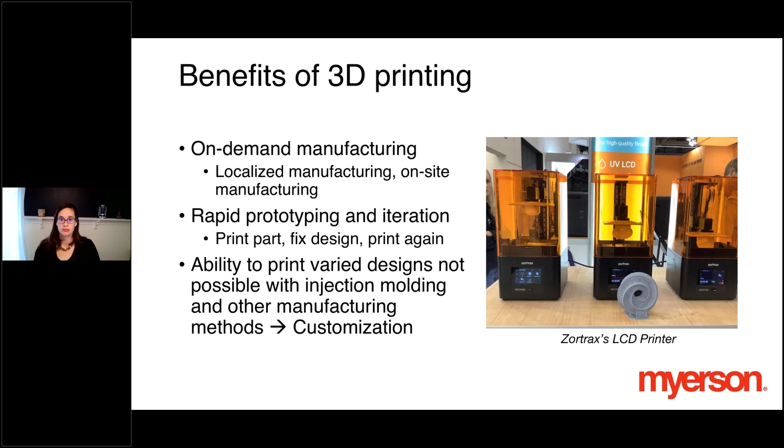I also like to point out that 3D printing for production is happening now. The pandemic was actually a really big catalyst for the 3D printing community, with different entities coming together to print replacement parts for ventilators, nasopharyngeal swabs for COVID-19 testing, as well as a variety of other components.

But really, the thing that has catapulted 3D printing to be prime time now for production applications is the materials. In the 80s and 90s, materials were largely acrylate based—brittle, they took on a lot of water, didn't print accurately or hold their shape. They were great for prototyping, but in the present day we have much better materials with improved strength, durability, less shrinkage, less moisture absorption, good temperature resistance, and the key properties that enable commercial grade parts that can withstand the elements they encounter when in service.

In addition, now there are better print technologies—improved printer components, projectors—and these things together really yield consistent processes. As a result, we're starting to see commercial grade part quality in a variety of applications in addition to dental.

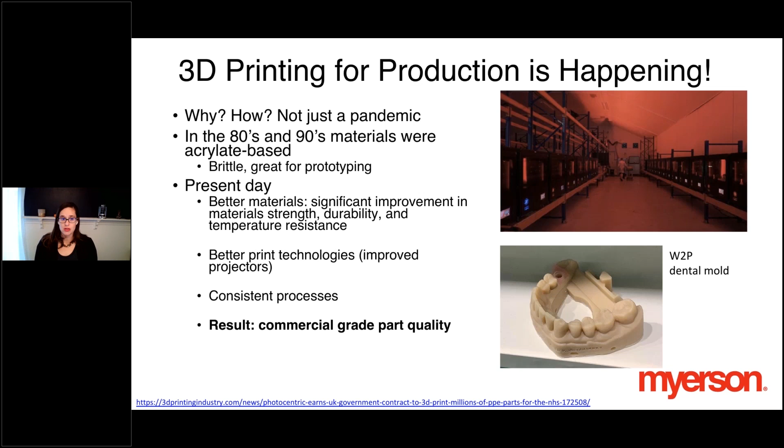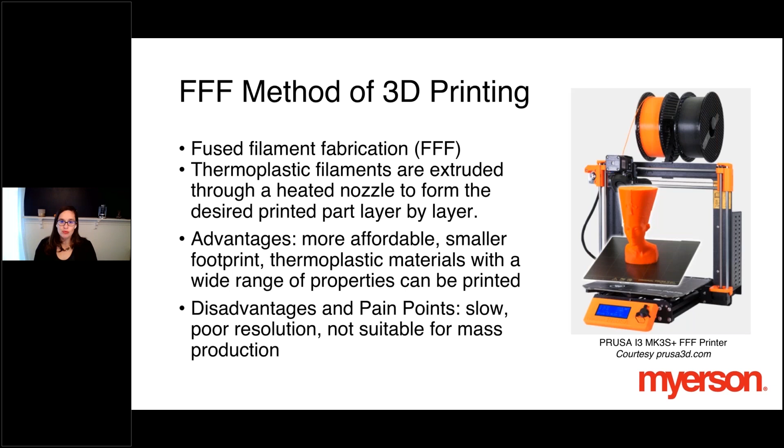As far as another polymer-based technique, powder bed fusion, and specifically selective laser sintering, or SLS, is where you have a laser aimed in the build space defined by a 3-dimensional model. You sinter a polymeric powder, say like a polyamide or a nylon, to form your desired part.

Now, the advantages of this are that the structures are self-supporting—you don't need to print the supports—and the materials have good mechanical properties. However, these tend to be really large industrial systems with big footprints, and as a result they're quite expensive.

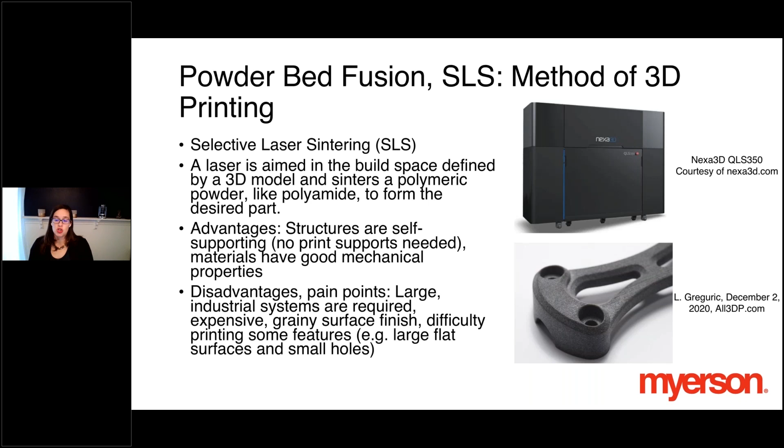The parts, as you can see from the example parts shown at right, tend to have a grainy surface finish. There's some difficulty printing certain features, say a large flat surface or small holes. I'm showing here just for reference the Nexa3D SLS machine—you can see it's quite big on the footprint.

This is probably my one metal 3D printing slide. I tend to be a polymer 3D printing nut, but it's important to understand from a high level how metal 3D printing works, and to compare it to polymer-based 3D printing. There are three main metal 3D printing technologies: SLM, or selective laser melting, direct metal laser sintering, and binder jetting. But all in all, what you're doing in these technologies is taking metal particles and fusing them together upon melting with added pressure.

The advantages are that almost any geometry can be created, and you can also machine and coat the parts as you would if they were produced from any traditional manufacturing method. However, some of the pain points are a really high cost of material and printer, the need for support structures, and these materials can be kind of heavy in the mouth for different dental applications. I'm showing here a really nice part from EOS in cobalt chrome, showing some different dental crowns.

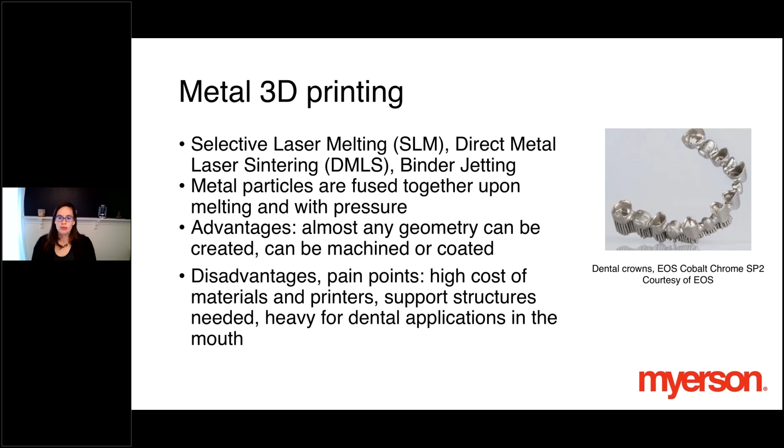So taking it back to the UV photopolymerization methods, a lot of them boil into two categories: you have the traditional laser stereolithography, and you have digital light processing, or direct light processing, printing with a projector. I'm going to spend the majority of the rest of my talk on photopolymerization and 3D printing, and why that's the more desirable technique for different dental and clinical applications.

Taking a step back on photopolymers in general, some of you may not know this, but photopolymer materials actually represent the largest technology segment and create the biggest revenue in the additive manufacturing market. They're reported to capture over half of the market for polymer materials used in 3D printing. It's estimated that photopolymers will contribute about 1.7 billion in revenues in 2022, according to the Tactile Report, which is a report I authored late last year, exclusively focused on photopolymers and additive manufacturing.

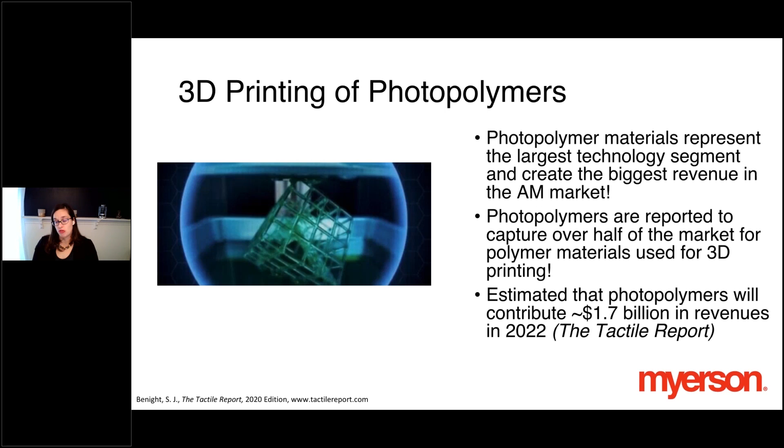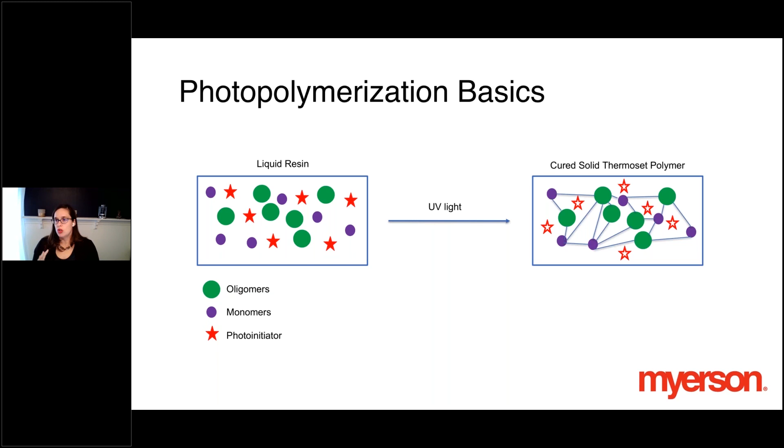If we take it back to basics, what you're doing in a photopolymerization is starting with a liquid resin that comes to you in a bottle, but microscopically, nanoscopically, there's a variety of different molecules at play interacting with each other. You have oligomers, which you can think of as short chain polymers. You also have monomers, which are just one component of a polymer. And then you have photoinitiators that react with UV light to kick off the photopolymerization reaction. So while you start with a liquid resin, once you apply UV light, these reactions take place fast, typically less than a second or a few seconds, and you end up with a cured solid thermoset polymer, which gives you those desirable properties for end-use applications.

It's also important to think about the chemistries involved in these photopolymerizations. Typically, there are a couple of different mechanisms of polymerization that occur - generally, in most cases, these are free radical polymerization or cationic polymerization. As far as the components within the resin formulation, you generally have the oligomers I mentioned, typically present from 25 to 90% of the formulation. You have monomers, present at 15 to 60%. You have photoinitiators, present at 2 to 6%, that kick off the reaction. And you also have additives and fillers, which can be present between 1 and 10%, depending on the resin and formulation.

The other thing to consider when working with photopolymer resins is that different printers cure at different wavelengths, depending on the light source included in the printer. So you can have a printer with a light source that cures and emits light at 355 nanometers, or one that emits light at 385 nanometers or 405 nanometers.

The 385 and 405 wavelengths are probably the most common for commercial printers, but there are other wavelengths out there too. The resin you're using is typically formulated for a specific wavelength, and this is because of the photoinitiator that's included. Sometimes you also need a sensitizer depending on the photoinitiator and the overall formulation.

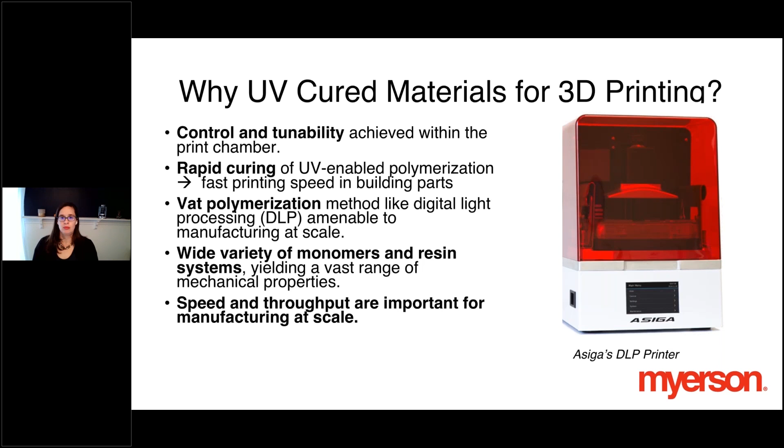I also want to touch on inkjet 3D printing. This is a really cool technique, because you're basically taking technology that was used to print on paper and applying it to 3D printing. In this case, you have inkjet print heads used to print photopolymer resins onto a build platform. Some other synonyms for this type of printing are jetted photopolymer, material jetting, or photopolymer jetting.

Now, some of the disadvantages are that these tend to be large, expensive machines. You also need to incorporate supports from a different material. And sometimes the materials, because the properties are good, can be a little expensive.

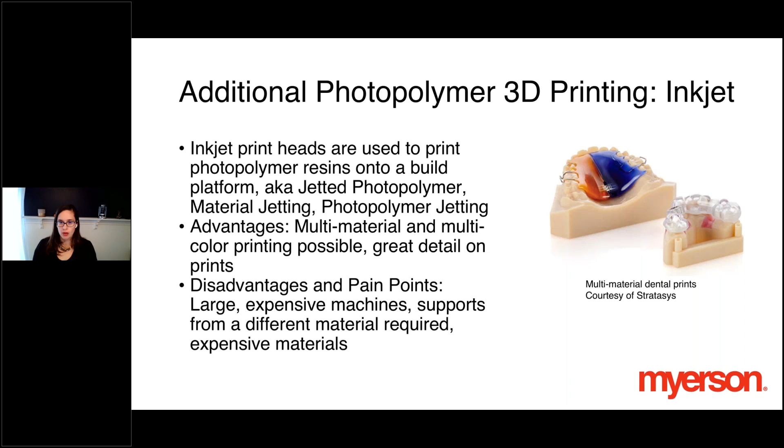We talked a lot about the different print technologies, but I like to say the dirty little secret of photopolymer printing is the post-processing. Really, the post-processing, after you perform the print, is where you derive a lot of the key mechanical properties in printed materials.

The print chamber, we talked about being a chemistry vessel, basically curing different parts at the completion of a print. But after that, especially when using a DLP type printer, you're left with this part dripping in liquid resin, and you have to take a few steps before you can say, here's my finally completed part that's ready for the patient.

A lot of DLP and photopolymerization-based printers let you use the printer to get a part that's just about fully cured. You may just need some additional UV light at the end to get your final, printed part that's ready for prime time.

But depending on the chemistry, sometimes you need a heat treatment. This can help activate another mechanism within the polymer, or help create durability, increase strength, or achieve a variety of other desirable properties. The great part about post-processing photopolymers is that rarely is sanding or any additional mechanical treatment needed, as you have to do with other techniques.

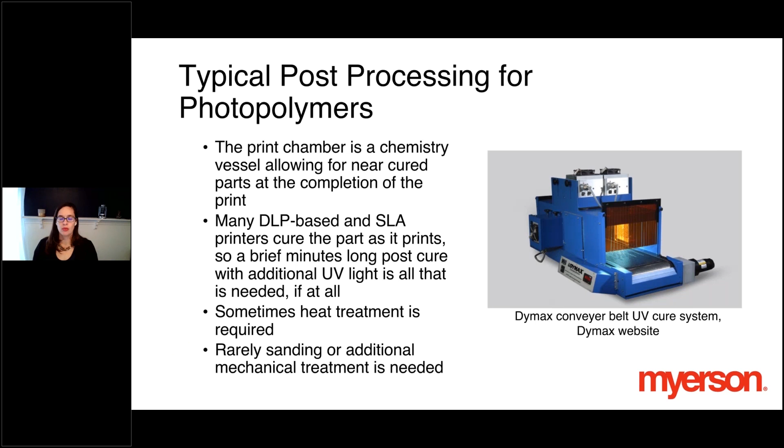So what's an example of this type of post-processing and why is it important?

If you recall, last year during the pandemic before vaccines came online, COVID-19 testing was very prevalent, and nasopharyngeal swabs were in great demand and widely employed. With 3D printing of these swabs, there are guidelines for post-processing outlined by the FDA, because a very methodical and consistent post-process is needed for these swabs to perform as intended, consistently. It's really important to have a consistent workflow with post-processing to achieve consistent end properties in the application.

So if you receive a 3D printed resin with instructions for use or optimized settings and post-processing protocols, that's generally the result of a lot of validation done to give you the mechanical properties advertised on the technical data sheet for the material.

It's important to keep in mind there are things you can do to ensure a more consistent post-process. Some of this comes down to the equipment and how reliable it is. If you're able to post-process multiple units in a batch, you can also use automation and different QC methods to ensure a consistent workflow and post-process.

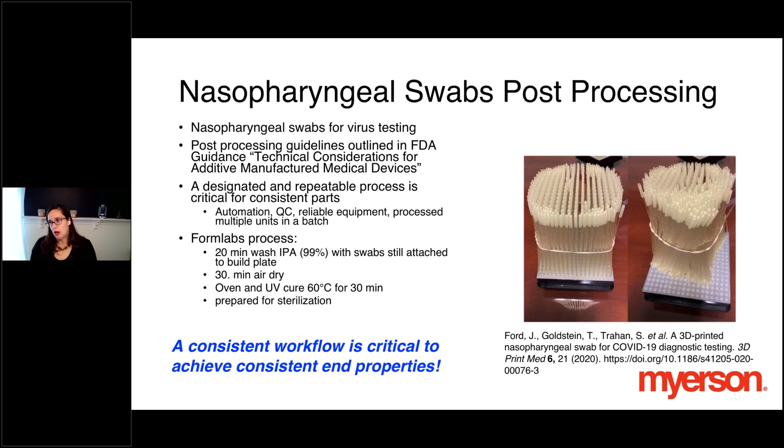When working with resins, there are formulation considerations to keep in mind. When the resin is in the bottle and in the printer, there's a lot going on, especially during post-processing. A lot of times these formulations are specifically tuned for a specific wavelength, but also optimized for through-cure between layers, especially in the case of DLP. That's really to minimize defects such as cracks or pores that can occur in the material.

One thing I like to note is that companies are routinely working hard to reduce the cost per part and the cost of the resin, and to improve speed and throughput, so that these resins are ideally tuned for production applications.

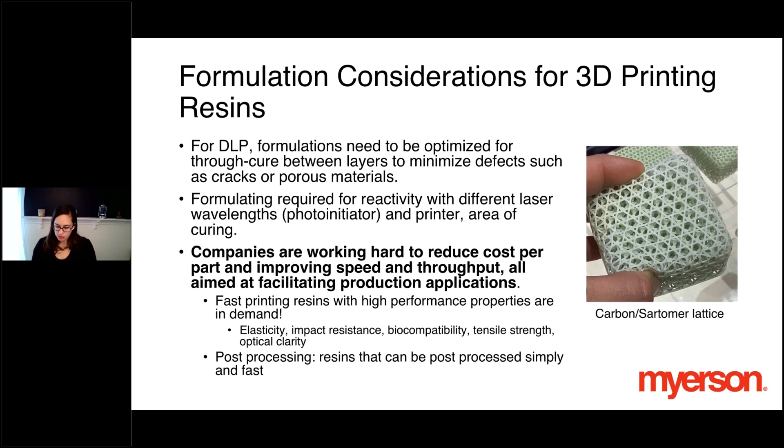So we've spent a lot of time talking about photopolymers in 3D printing, the different technologies used, and post-processing. I want to shift gears now toward dental and how photopolymers are being used in the dental space currently, and comment on the evolution of using 3D printed materials for dental.

At first, labs started to 3D print models, then shifted to using intraoral scanners to generate impressions. From there, printing wax for crowns and bridges and swapping that with ceramics and gold was an application. Surgical guides have also been printed, which doctors use as a path to drill for implant placements. Also printing of night guards and splints, temporary restorations, and now recently printing of teeth and bases for dentures, using these 3D printed materials not only for temporary dentures but also permanent dentures, which is really exciting.

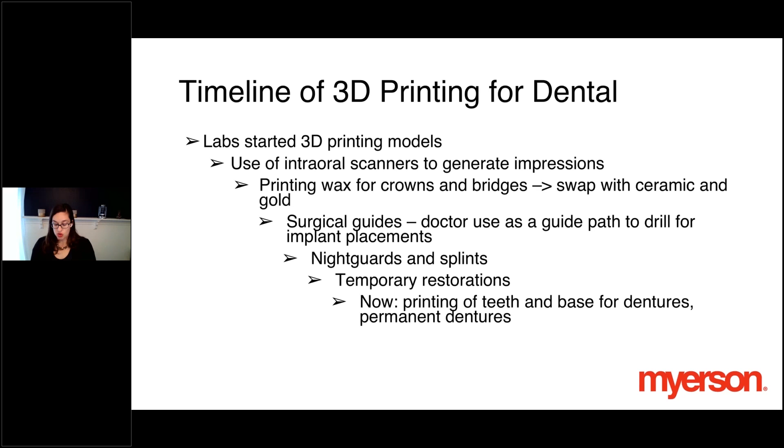Now, as far as the clinical applications of 3D printing in dental, there's a variety I'll describe that I think are perfect for photopolymers in dental. It's important to note that while the dental industry was an early adopter of 3D printing, new materials and more advanced printers are actually what's responsible for enabling a wider range of applications that weren't possible before now. In addition, 3D printing offers the customization needed for dental service laboratories as well as offices chairside.

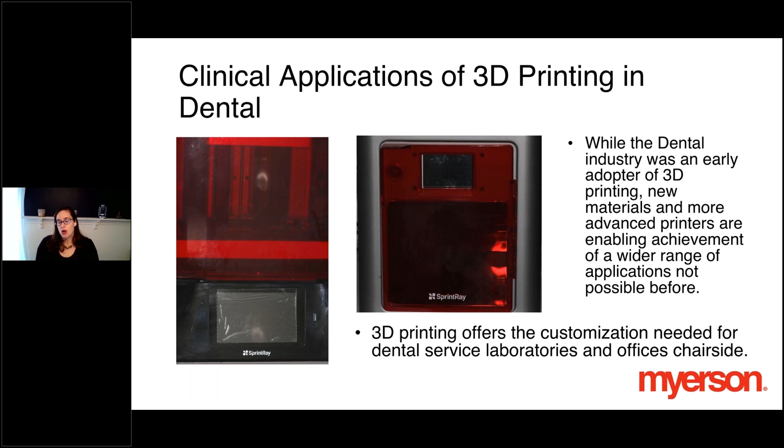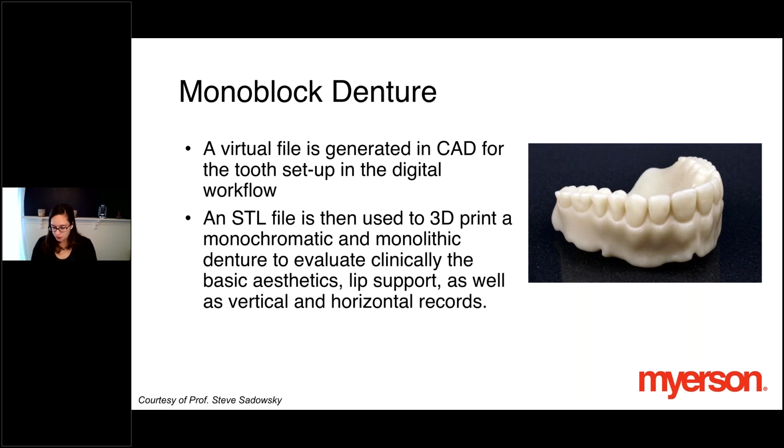Orthotics and night guards. Here, showing some good examples at the top. You have an intraoral scan of both arches and an occlusal or bite relationship. You can also employ a 2mm thickness that can be programmed for the orthotic, and an STL file is then generated for a maxillary night guard. I want to thank Professor Steve Sadowsky for these clinical application slides that he created.

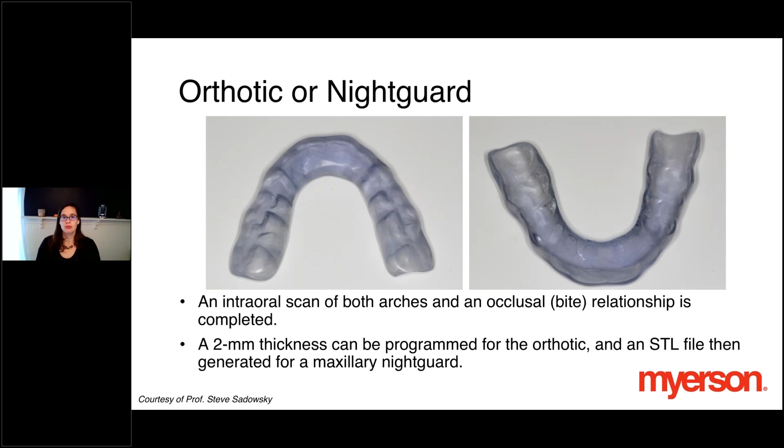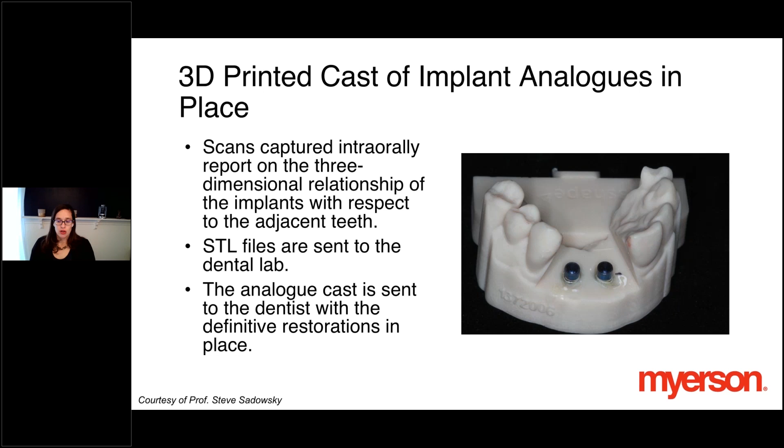Another example, you have 3D printed casts of implant analogs in place. Scans can first capture intraorally the report of the three-dimensional relationship of implants with respect to the adjacent teeth. You then have STL files that are sent to the dental lab, and then you have the analog that is cast and sent to the dentist with the definitive restorations in place. A great application for 3D printing.

3D printed models for tooth-borne restorations. Here you have an intraoral scan of both arches that's completed, including preparations for an 8-unit bridge that's shown. You can then scan for the bite relationship next, and then you have STL files that are used to generate the models. In the images, you see the models up top, then you see the actual patient's mouth without and with the preparation as a comparison.

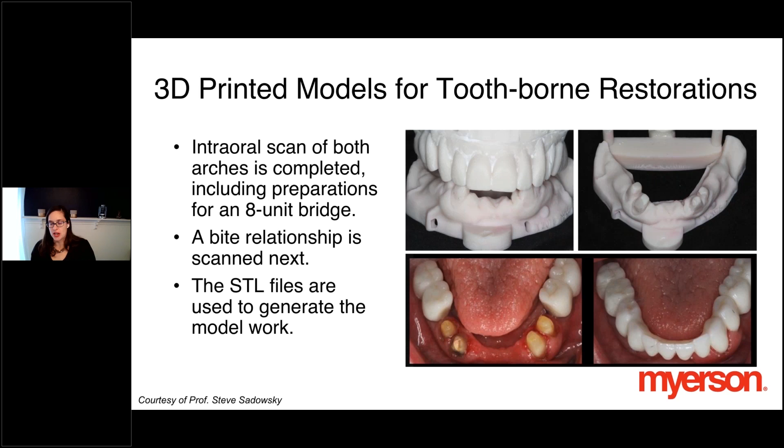Another really hot application right now is the 3D printed maxillary arch and how that's used to thermoform a clear aligner. In this case, you have an intraoral scan of the maxillary arch that generates an STL file, and then you have a 3D printed cast for clear aligners to then be fabricated. There's also things like a direct print aligner that people are working on where you can kind of skip the thermoforming step, but then just directly print your transparent material for an aligner, which is also a really exciting application to think about, especially if you can print this chairside in the dental offices.

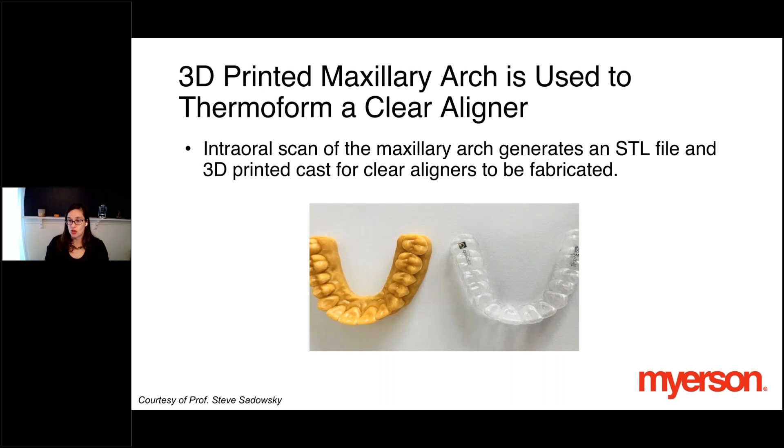Finally, 3D printed try-in to verify fit, occlusion, and morphology. This is an economical procedure to evaluate a critical aesthetic for the appliance in the patient's mouth. Also employing 3D printing for this application allows a reversible state before the definitive restoration is fabricated. So it's really a great way to determine whether what you've created, if the final restoration is actually going to work with a sort of a temporary version of it.

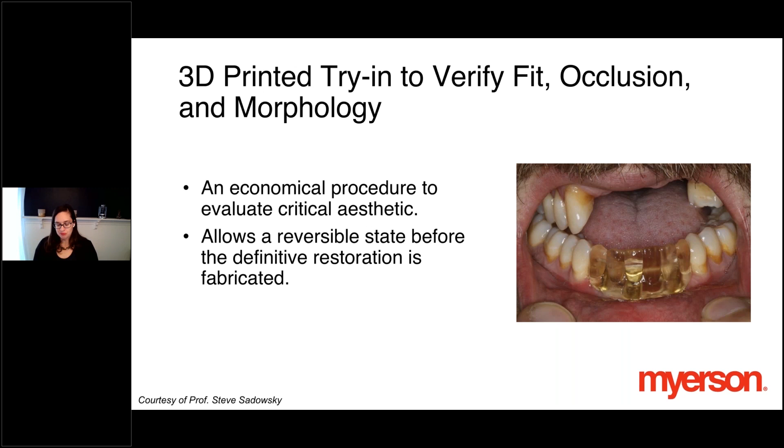Now, with all of these different applications, really the key to expanding upon these applications and including others are new materials. New materials are critical to enabling expanded clinical applications and new applications. And with that, I'd like to introduce Trusana by Myerson. Trusana is a resin that will be available later this year that is really targeted for printing of teeth for denture applications. Also, we'll be having a denture base material coming out early next year.

Now, Myerson's been working on this product for a while, and it's really, really important to understand that what goes into this product is, number one, true science, where we have some unique chemistries that haven't routinely been employed in dentistry, but really are highly scientifically designed to give the durability and the strength required for applications in the mouth. I'll share some data with you on Trusana, where we can deliver high strength that's even maintained after exposure to water. As a result of this Trusana chemistry, there's also resilience and toughness that come from the product, and really able to withstand different elements or environmental things that you might encounter with a patient using the appliance made from Trusana. So it's something we're really excited about.

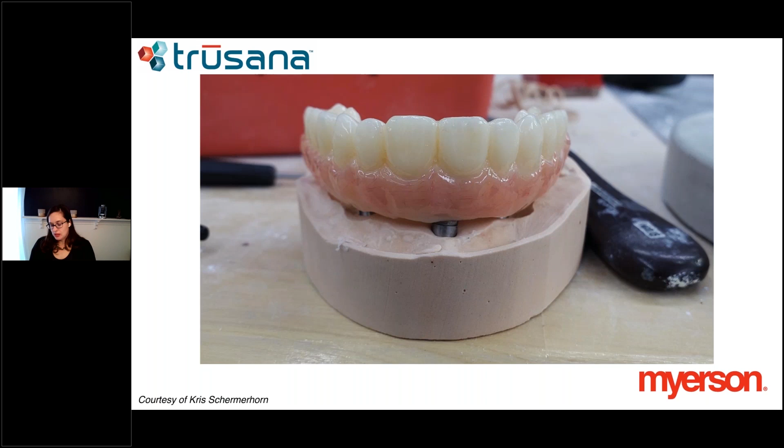So not only is it based on good chemistry, good strength and toughness, but also Trusana shows very aesthetically pleasing and beautiful results as far as the comparison to even real teeth or other premium denture products that are out there. I'll show you here an example where we have printed teeth. We also have printed gums, all from Trusana. And you can really see the different transparency in the tooth, and you can really see, compared to a shade guide, how on point the shade is.

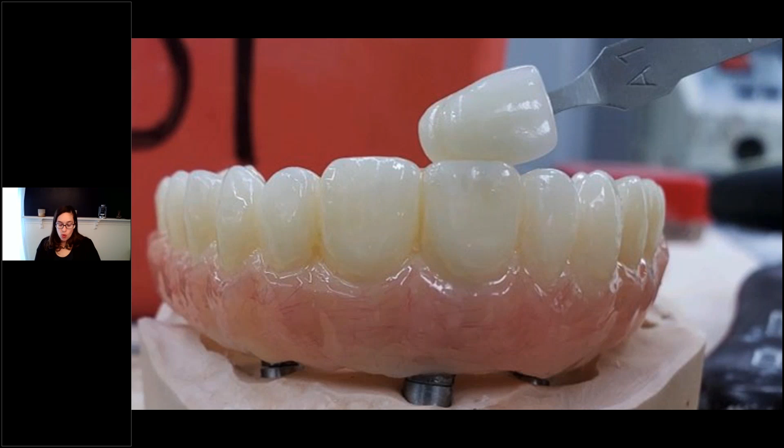What we've been doing is evaluating this material with different beta labs, getting some really good feedback about the ease of workflow compared to other dental resins, the aesthetics, how on point the shades are, as well as the ease of working with the material. So it's something we're really excited about, and I'll tell you a little bit more about the mechanical properties here in a bit.

Again, just showing here some of the 3D scans of Trusana teeth, and the resin will be available on different printers, including the Asiga, the SprintRay, and also working on the Roland Ackuretta as well. So the plan is definitely to have Trusana available for a variety of different printers, really the SprintRay and Asiga to start.

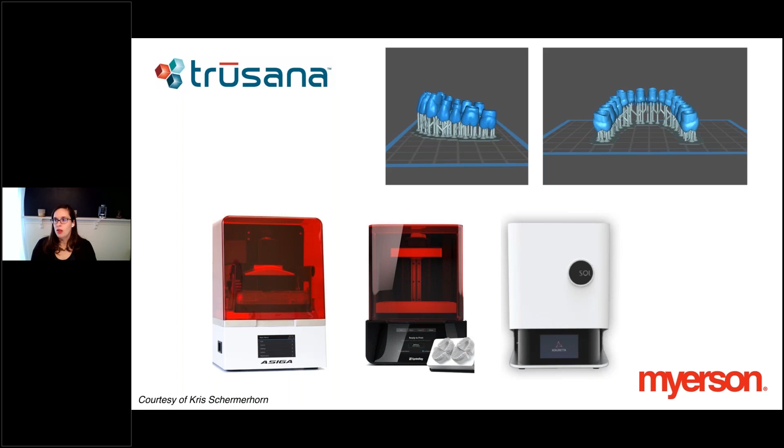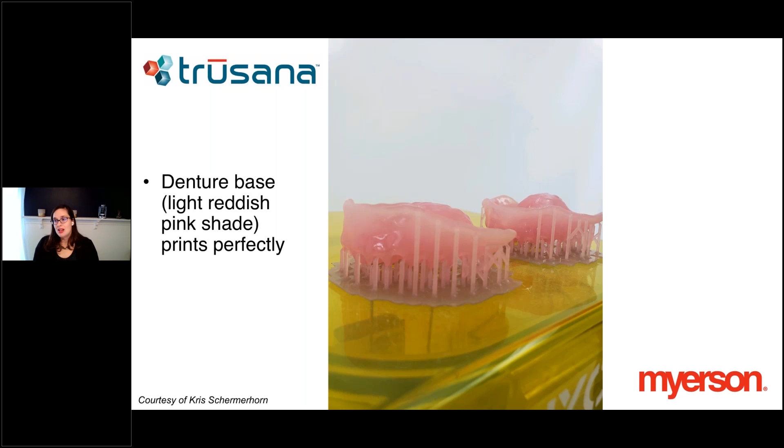Just another example, here we have the Trusana denture base shade. This is the light reddish pink shade, prints perfectly, looks great. Really exciting to see a premium 3D printed tooth product that has some of these aesthetics. It's not really just the aesthetics though, it's the mechanical properties that we observe.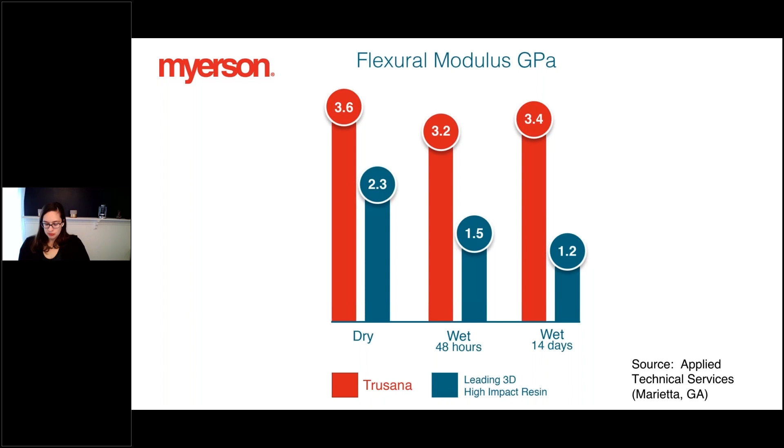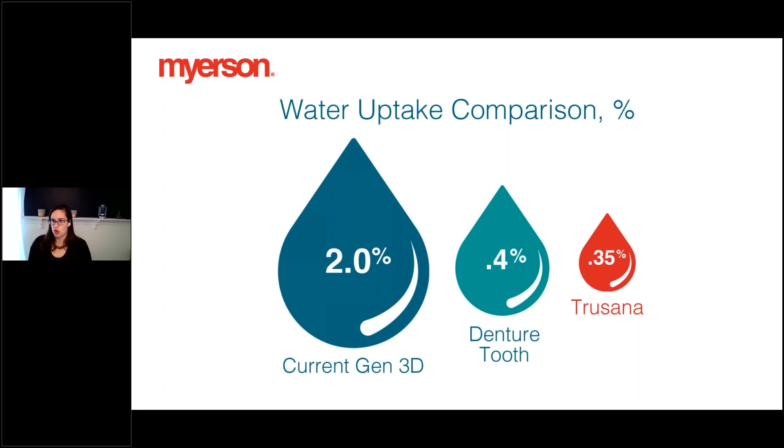So not only are the mechanical properties performing very well in class, but the water uptake is also quite remarkable, or the lack thereof I should say. So if you have a current generation of 3D printable resin, the water uptake tends to be around 2%. If you take a standard denture tooth, the water uptake tends to be around 0.4%. But with Trusana, the water uptake is 0.35%. And that's part of the reason why we're getting such good mechanical properties, even after 14 days of water exposure. Something we're really proud of with this material.

I can't mention mechanical properties without at least mentioning wear depth. So what we did is looked at an economy tooth as a comparison and performed some testing. You can see that the wear is quite high comparatively. We also took a premium tooth, looked at the wear testing, and while it's much lower and on par with lithium disilicate, if you compare Trusana with these other three materials, the wear over the same amount of time is actually about half or much lower. And again, these results are performed by a third party out of house as a comparison.

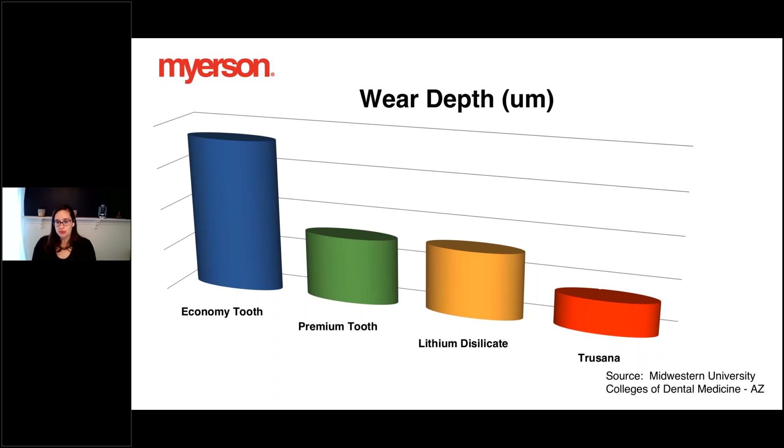So in summary, these are the cured material properties for the Trusana resin. We mentioned flexural strength and modulus, and I'm showing here also the tensile strength and modulus. It's important to note as well from this slide that each one of these methods were performed according to ASTM or ISO standards.

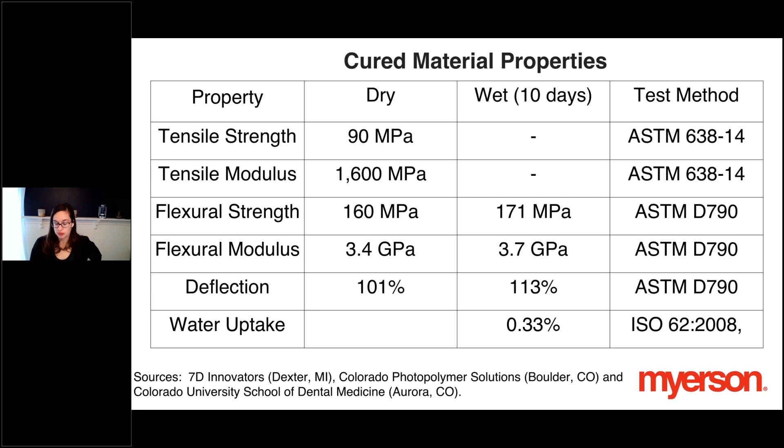I also like to highlight that as part of our development, we're currently testing with different universities, such as Loma Linda School of Dentistry, the UConn School of Dental Medicine, the UCSF School of Dentistry, as well as the University of the Pacific, all trialing Trusana now for different cases. We're looking forward to getting that feedback.

So far it's been really positive, and more of that will come in over the next several weeks. So if you're wondering when can I get my hands on some Trusana, it is going to be available this year, the tooth resin. I would say in the next couple of weeks our premium denture tooth resin will be available, and then in 2022 we'll have a high impact denture base resin available as well. As far as the printers you can print Trusana on, initially it will be the SprintRay printer, and then also the Asiga printer. So something we're really excited about.